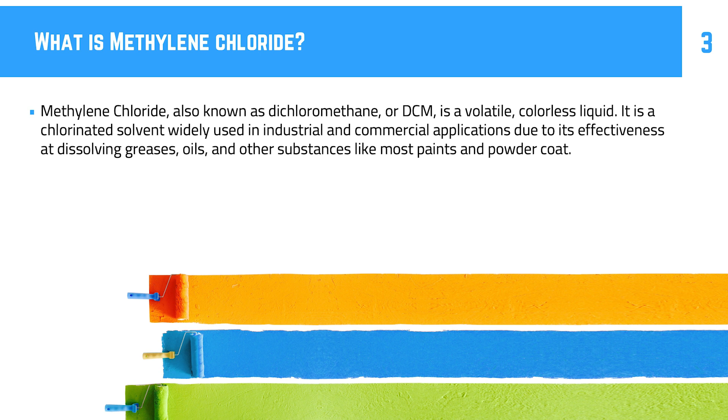So methylene chloride, what is it? It's a bugger. It's known as DCM. It's volatile. It's colorless, and it's nasty stuff. It's a chlorinated solvent. And the textbook definition is here on the screen for everybody. It is going away. The EPA is working on regulating its use in industry out, and that's largely due to health reasons. So there's a reason, though, that this industry uses it, and many industries use it, not just powder coating. Why are we chemically stripping? It's efficient. It's ideal for many of these applications. The process is ideal - it's not ideal for human health and environmental safety, but it's ideal from a process perspective in many ways and in many applications. And it's effective. It's faster than the thermal burn-off, and a lot of abrasives on the market will struggle to remove some of the more difficult powder coats out there as well. And it is an effective grease removal in many applications as well. So it's used, it has been used, because it's effective, largely.

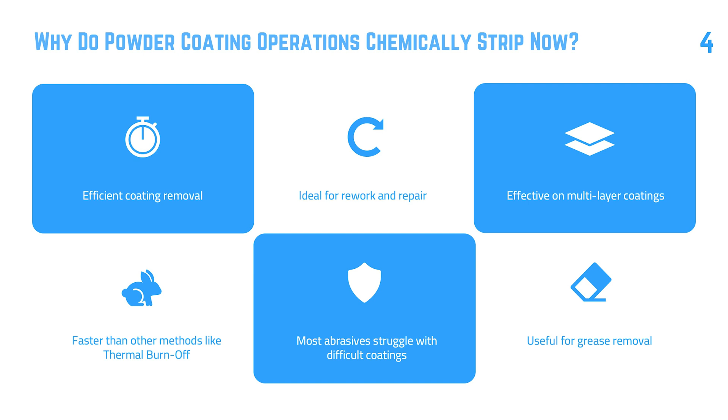So there are drawbacks, and this is kind of starting to touch upon why it's going away. So it is hazardous to human health - immediate contact can cause chemical burns, and like really, really bad ones. Doesn't have to be a long contact either. And then there are longer term health outcomes. There's studies out there that link this to cancer risk and also neurotoxicity. This is why the EPA is going in the direction they are, but it's why some processors have already moved on from chemical stripping. Some of our customers have totally eliminated their reliance upon that and gone to just blasting. A lot of it is, they get certain alloys that they don't know what they are, or their customer unfortunately doesn't know what they are, and they're expensive parts. Typically the parts that aren't going to be able to make it through chemical stripping - because they'll be ruined or totally destroyed one way or the other - are more expensive metallurgies. So there's some downsides, there's some risks in that way. Of course, there's ways to test what the metals are, but that again adds steps to your process. And there's a cost component here.

Think of it as an extra step. Jacob, I know you've talked with me a few times about that in a business process, like having that extra step—if it's not necessary, it just adds cost, and it also increases the chance for failure, and it's increasing the amount of time you have to spend on a part.

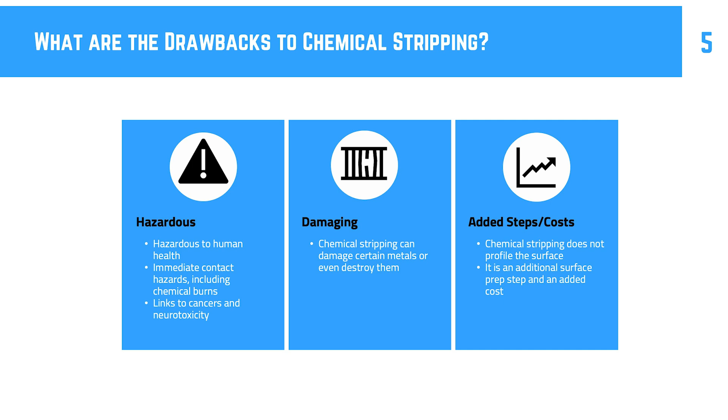Yep, exactly. So the main reason is safety, right? The EPA made a determination, and they issued this with a final rule back in 2022, late 2022. There's other chemicals out there that have gone this way as well—there's a few examples here. This is very unlikely to change. I don't think that this is political. I suspect that this is going to stick, and we've already seen some suppliers actually exit the market entirely because of what's coming.

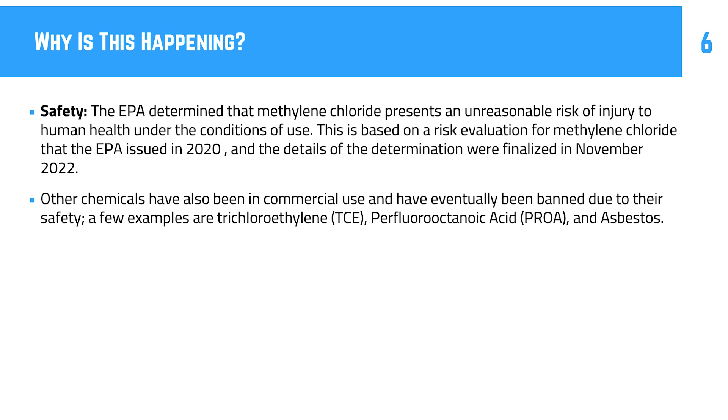So the regulations that are coming, what they're talking about—it's the 2024 methylene chloride regulation under the Toxic Substances Control Act.

EPA's making a cutoff for the use of this as of May 8th, 2029, on what is essentially a special carve-out, and that's for use removing paint from wooden furniture. For most other applications, the cutoffs are actually quite a bit sooner.

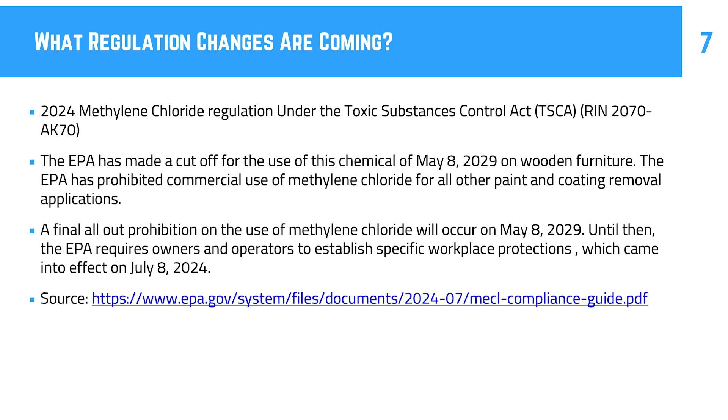We're looking at the things that are coming into effect this year, and I believe we have a chart on that. Yep, so here's your timeline.

February 3rd, that's when the hammer came down, where you have to stop distributing it in commerce. May 5th this year is when retailers will have to stop distributing it. And manufacturing, other than for the special cases that we already talked about, will become prohibited.

And this is a question that we were asked even before this presentation—so, well, what about the imports? And no, the regulations are very specific on that. It includes a ban on imports, so we put that on the timeline. Thought it was important to put it there.

And then beginning August this year, processors are going to be prohibited from processing it. And then you have late April next year, where industrial and commercial users will be prohibited from use of the material. And then the special carve-out ends everything May 8th, 2029, regardless of what the application or end use is.

So this is going away, and depending on where you are in the industry, it's going away a lot sooner than later. So now is the time to be making a plan for how you're going to adapt your business to this.

Yes, it's totally—I've heard this a few times. Well, hey, I stocked up, so I'll have some for nine months. Great, what are you going to do after that? Yeah, you're not going to be able to get it. You're going to set yourself up for failure doing it that way.

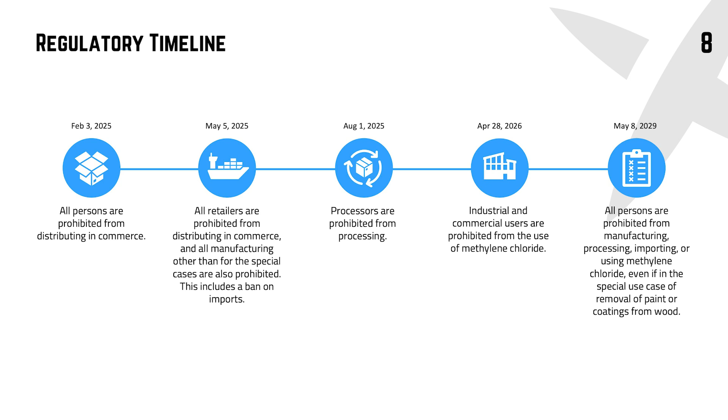I think this is a good overview. We'll keep going. The Workplace Chemical Protection Program - so if you're using this material, even under special use, like say you're working on wooden furniture, you're going to be required to develop and implement an exposure control plan.

One of my colleagues who researches these sorts of things explained to me that for a small business, developing that, implementing it, and being able to survive an audit - because if you're using it under some special program, you can bet you're going to get audited, and it's probably going to be more than expensive. And if you don't pass that audit, the cost of the fines, it's just not worth it.

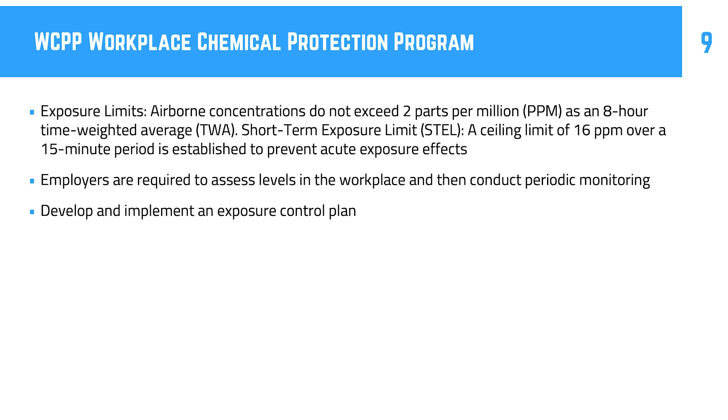However, there's a way to do this, and this touches on some of the basic requirements. But even reaching those requirements, the exposure limits are very, very low. The testing that's necessary is expensive and fraught with issues. It was explained to me that it's much harder to pass the test, even if you do everything that in theory works - you can still have something pop too high, and now your whole program is in jeopardy of being shut down. So it's tough.

So, of course, we're an abrasive manufacturer - Superoxalloy abrasives is what we make, all made in the U.S. And we're going to talk about how we would like you to adapt. But in talking with Jacob and a lot of our powder coating customers, we have a number of powder coating customers who've adopted our product.

They started in a cabinet, some suction, some pressure, and then they moved on from that to, okay, now we're going to get a 185 or even a 375. A couple of our customers have upgraded to 375 compressors, and they're able to put a lot of horsepower out of the end of that nozzle.

What I can tell you is that the customers who have made that transition - yes, it was an investment, but the return they're getting is huge. Their workers who are nervous about safety, some of them have had chemical burns. I'm not talking long-term risk, I mean immediate - where a guy's hurt his hand or something like that. One guy had an eye injury that was god awful.

But these kinds of risks, if you can just totally eliminate that - because they're investing in blasting, what used to take them say 15, 20 minutes for a car wheel, for example, now they're getting done in under 6. The guys running a 375 laugh and say they can do it in under 2. I'm like, alright, sure. It depends on how quick you can maneuver the wheel around, or if you set your rollers right - awesome. The point being, there is an alternative to this that doesn't require any chemical strippers.

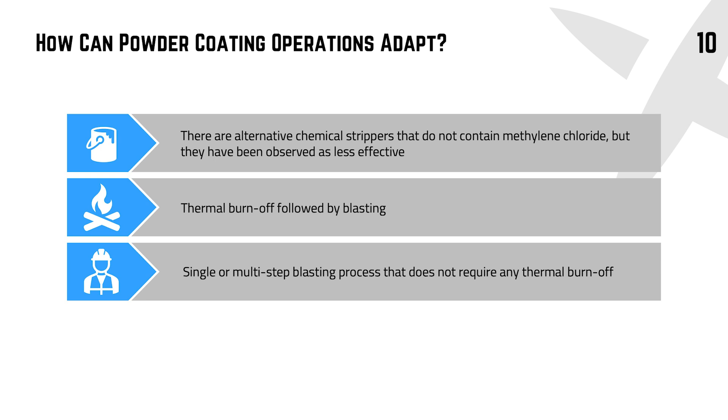Yep, absolutely. So now we're going to talk a little bit about how we can do this with an abrasive, actually eliminating the chemical stripping entirely from your process, right? There's some benefits to this if you actually invest in it. If you just simply have a suction cabinet and your compressor's undersized, this isn't going to work. You're going to have to do more than that.

A lot of our customers that first start with us are starting with an undersized compressor, and then they're working up from there. You got to start somewhere, but I'll tell you, the lower first cost has a much higher ongoing cost in a process like this. So to me, it's totally worth the investment.

Now we'll talk a little bit about that. If you're in a space-limited shop or layout, and you're already going to have some square footage devoted to blasting anyways, and you eliminate the chemical stripping, you're freeing up some floor space. How much will depend—that's unique for everybody. But there's a real consideration of freeing up floor space or clawing that space into your blasting space, if that's an option.

Getting rid of the chemical strippers, right? We can't predict what regulations will be in the future, but I've heard from a lot of folks who said, well, now that the good stripper is going away and I've got to do all this extra stuff to make a chemical stripper actually work the way the methylene chloride based ones would, I'm going to do all this work, and then six, twelve months, two years later, it's going to change again and go away too. So a lot of people are saying, now I'm confident that an abrasive like 10X is going to be around. It's got staying power, so a lot of folks we've been talking to are going that way.

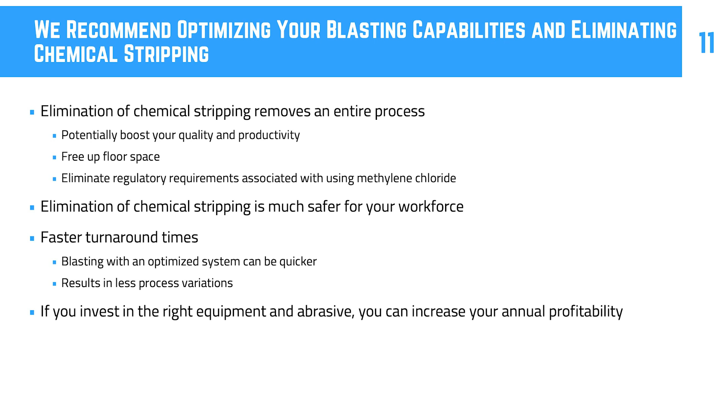So now we're kind of laying the framework here for what making this transition, and still maintaining profitability and potentially even boosting that profitability, looks like.

So we want to be able to get the job work done on time or ahead of schedule. We need fast blasting. Getting your abrasive consumption within the parameters that we expect is important. We can help minimize your downtime. We have an amazingly safe abrasive.

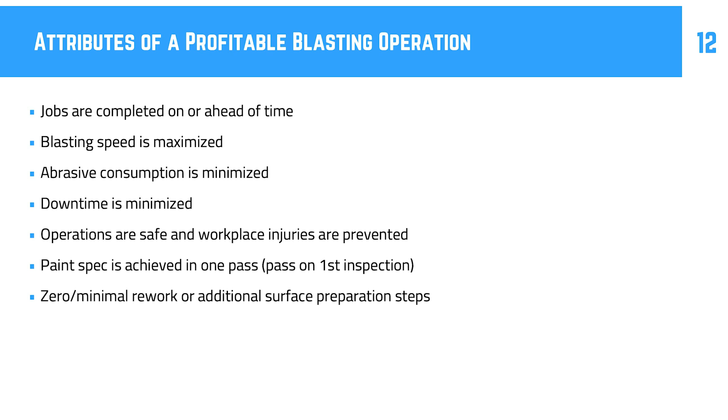Some of our customers in this industry have specs they have to hit, and when we take away a step in the production process, being compliant with those specs just tends to get easier. We're also helping to minimize rework. What we want to talk about today, we don't like to have to do rework. Rework is probably the most expensive thing in a powder coating operation that you can end up having to do.

Every component of a blasting system has a key purpose. And if any one of those components is out of whack, it can make the difference between being profitable and even running at a loss on a particular part of the job.

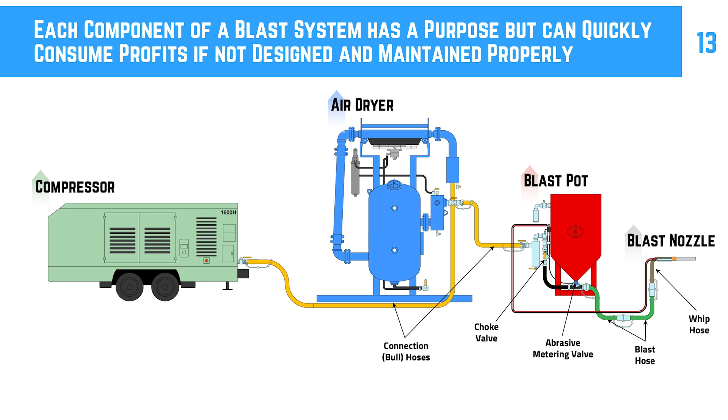So this is a nice little visual here, and a shout out to our colleague Elena for pulling this into this presentation. I don't expect everyone's compressor to look like this, and again this is just for illustration purposes, but the compressor is where it starts. It's the engine of the blasting system. Think of it as the heart of the blasting process.

It's really important to make sure you have the amount of CFM you need. I always tell everybody, always get two sizes bigger. Oh, I need a 185? Great, I have 375. Why would I do that? Because you're going to grow, and you're going to have this and that, and now you're running another spray gun over here, or whatever it may be.

Maybe you're going to get into something that needs other sources of compressed air, and you're stealing your productivity from your blasting process if the compressor in your facility is sized for that process and now you grow. So if you upsize your compressor, you can avoid that problem to begin with. That's what I recommend.

But the key here is to not undersize. At a minimum, do not undersize. Make sure that you're able to get the recommended pressures. We have charts on our website, and Jacob and myself are available in the group for anybody who needs to bounce ideas off of - hey, would this work, would that work? This is what we do. We make sure that you get the right answers.

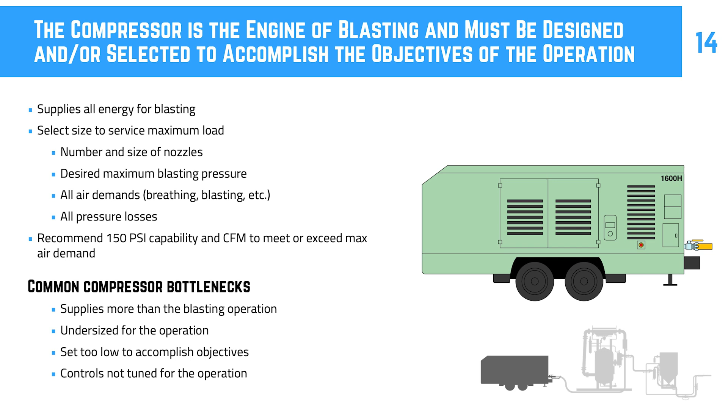And then, of course, the compressor controls. Compressors can be set with all kinds of energy saving features that are great, but sometimes they get in the way of performance. So again, that's very situation to situation. Even two identical compressors coming from the factory - sometimes different dealerships put in different programming logic, and one can work great while the other can be an issue.

So we see that. Next step, air dryer. If we're sending wet air to what you're trying to do, you're going to get embedment. You're going to have all kinds of issues that come with that. Compressors are compressing at least 100 to 1 - the air in the atmosphere is being compressed 100 times. We're squeezing the water out of the air, and now we're throwing it at the substrate at high pressure.

And there's reasons why most compressed air systems are always going to include, right out of the gate, some sort of air dryer, and then maybe even an additional moisture or water separator. So it's important to make sure the air dryer in your system is matched for the CFM of your compressor. If it's undersized, it won't perform. Oversized isn't usually an issue, but it's just not cost efficient. So you want to make sure those are married up to each other appropriately.

If you have moisture in your blast air, we've seen excessive abrasive residue left on the surface. You've seen problems with coating quality in some cases after blasting, and a lot of that's just because of the first problem we talked about. Our abrasive has an uncommon benefit of delaying the formation of rust bloom after blasting, and that often goes away if you're blasting with a bunch of moisture in your air.

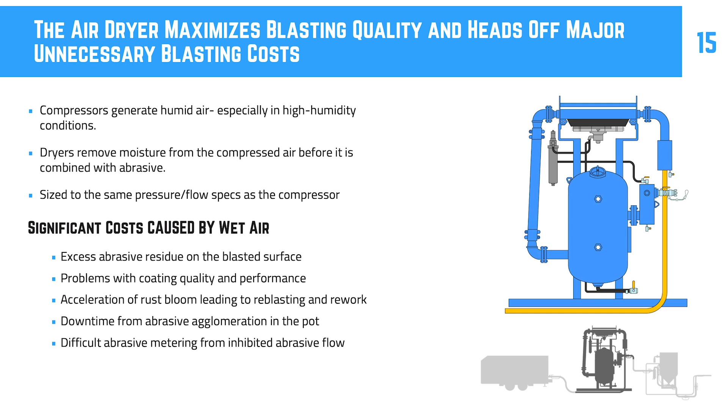So you want to avoid that. And again, your abrasive metering can be challenged. It can have issues if you are blasting with wet air. So there's a number of reasons, technically speaking, that we want good, clean, dry air.

Blast pot metering valve. For this example, we're specifically talking about a pressure system, not a suction system in a cabinet. There are a lot of cabinets out there that are great with suction systems, but in my opinion, if you're replacing chemical stripping and you have any kind of volume of parts going through your business, you're going to want a pressure system.

That's why we're focusing on this, because this whole video is essentially informing you of the regulatory changes with the loss of a chemical that a lot of folks are using in their business, and how to adapt to that. I would not adapt by going with a suction cabinet. I would immediately go to pressure blasting.

And a suction cabinet won't even remove powder. You'd be spending hours and hours, at least 6 hours on one wheel. It wouldn't be feasible to even be a business.

We have customers, to give you a sense, that are doing an average size wheel in under 5 minutes. And then we have customers with a 375 that are saying they can do it in a little under 2 minutes. That would just never happen with a suction system.

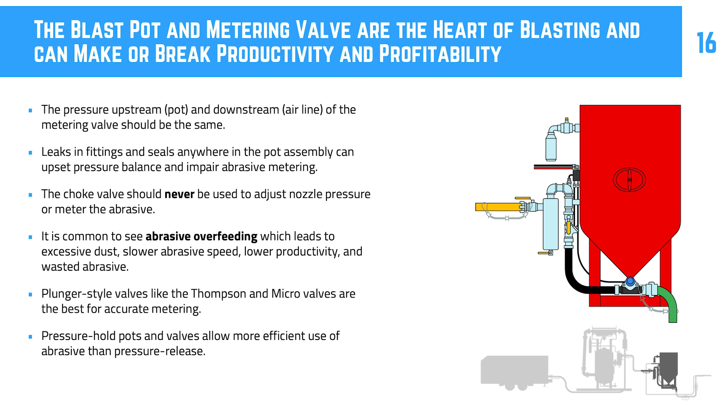This is so important. We're using examples of what we would see in large industry, but regardless of how you connect from your compressor to your air dryer to your blast pot, and then your blast pot to your nozzle, it's all about sizing correctly. If you undersize that, I don't care how, you could have a 600 horsepower compressor running one blast nozzle, but if you undersize the critical connection points, you might as well have a 10 horsepower compressor. It's just not going to work.

You can't limit the energy delivery of the compressed air. Think of it this way: if you're doing this, you're investing a lot of money into getting that air compressed, clean, and dry.

And if you undersize it, you're just not going to get your return on that investment. So it's very important to do this. We have guides on our website that help you understand exactly how to size your hoses, your nozzles, and all of that. It's pretty simple, but we focus on this so much because a lot of people undersize things. Hey, I'm buying hose or I'm buying pipe, and if I go a quarter or a half inch lower, look, I can get this deal - and it's really the worst deal going.

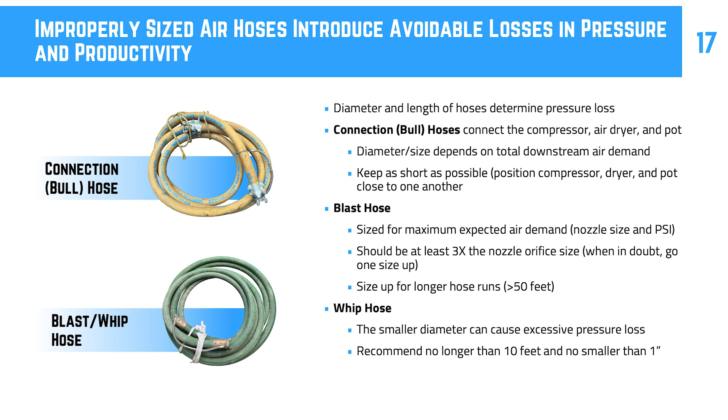Nozzles are similar. There's a lot of different kinds of nozzles out there. Our abrasive works with - I've not seen a nozzle that our abrasive doesn't work with. Some are better than others. We prefer this XL nozzle, but for some applications it's not appropriate. We have an entire web page, and I think even a video now, about nozzle selection.

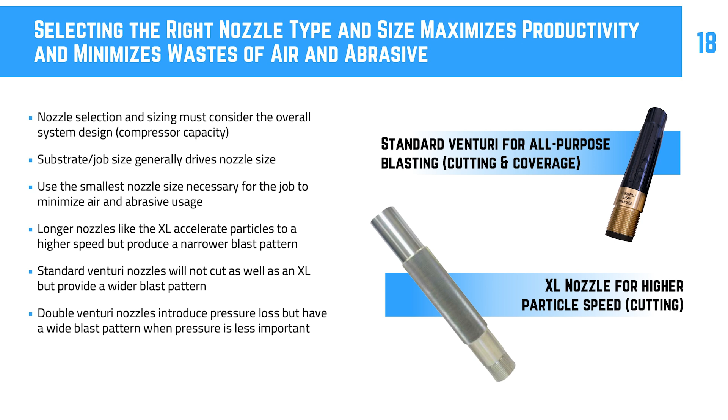And it's similar to the connections that we talked about - don't undersize it. The other thing that happens is people get it right, but then they've been blasting. They've got 4,000 hours of blasting time on a nozzle, and that nozzle is now 3 sizes bigger than when you first bought it. These things are wear items, they're consumables. They wear out, and when they wear out, it's time to replace them. You're not getting a return on your investment in this whole blasting system if you're running a nozzle that's 3 sizes bigger or 2 sizes bigger than what it's supposed to be. Your air pressure gets reduced, and the Venturi effect is gone - that Venturi isn't doing what it was designed to do once it's opened up. So just think about that.

Steve has talked about this so much - blaster training and technique can make or break whether the business works. This particular image here, Mike is the blaster. He's a Canadian customer of ours, a powder coater. They use EpiX MP, and they were so impressed with our product that they actually asked if we could do a customer spotlight, like a testimonial.

So there's a video on our YouTube channel - Impact Coatings is the name of the business. I think they've been using our product now for a little over a year. They told us that once they got the pressure up and understood how to use our product, they were able to double their throughput and double their profitability. Also, being in Canada, they haven't had a methylene chloride option up there for a while now, and they had already gotten rid of and gotten away from that. They would only do a process like that in an emergency situation, and they're blasting everything. So they had a huge setup, and they're able to handle it.

If you watch the video, it's wild - I mean the part that's there, he's done in something like 10 seconds. He's got to flip it around, and he's got 10 seconds on the other side. It's very fast. He said that blasting used to be the bottleneck for the business, and now coating - everything other than blasting - takes much longer. The blasting, he's able to put parts out that are ready to go 2, 3, 4 times faster than what the rest of the line can keep up with. And that's what our product can do if you make the investment that we're suggesting.

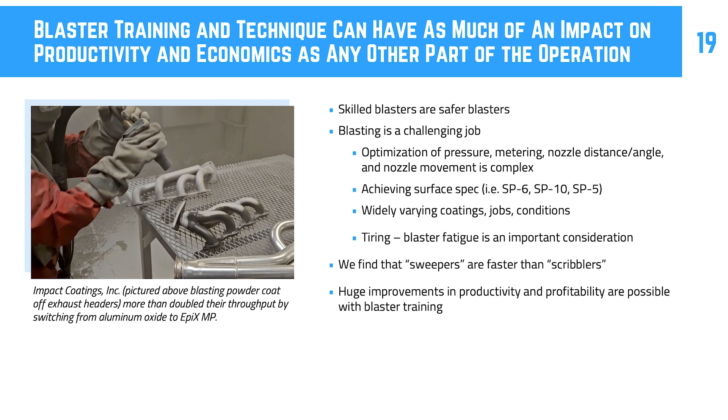This is very easy stuff to learn. It's totally worth doing. There's a lot on this page. Again, if you're not quite making this transition just yet, this might be a little further into your process when you do, but there are some basic tools.

Goodbye -- it's going to cost you so much money to be blasting with a worn down nozzle. It'll make you go slower, you'll use more energy, and you'll get lower quality surfaces too. This is real, and your abrasive consumption may even increase because you're not able to get the proper pressure. It's just so important, right?

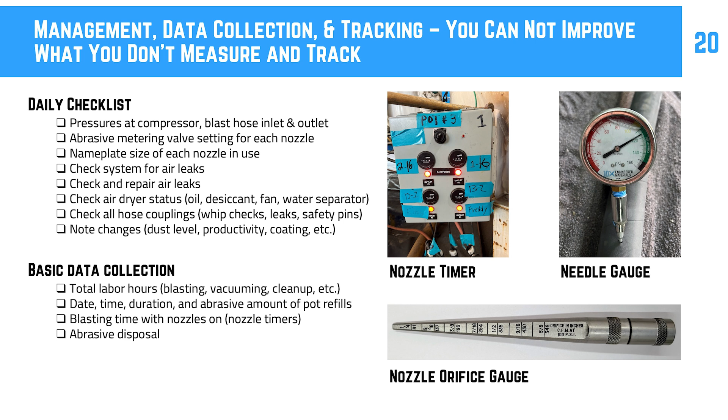Now, this kind of explains the example that we're using here is a larger job, and largely because we put this together quickly.

Jacob came to me and said, hey, we need to talk about this. People are asking all the time, you got to get some information out there because people want to know, and you guys are a great group who have the resources to bring this knowledge forward and get it organized. So we put this together quickly for that reason.

So we're kind of recycling one slide from Steve's last presentation. I don't know, Steve, if you want to talk through this, but we wanted to include this so people have some background on the case this can make. Yeah, I can quickly cover this. So when we did that other webinar, we were focused on profitability.

And what Jake covered today, everything from the compressor to the nozzle and the way the blasting system is set up, all matters greatly. But then there's the training of the blasters.

And so what we did is a little economic analysis. This is very conservative—the actual benefits are probably higher than what's in this chart. But let's just say if you have a blasting operation, the base case, and your net profit on that is 55K.

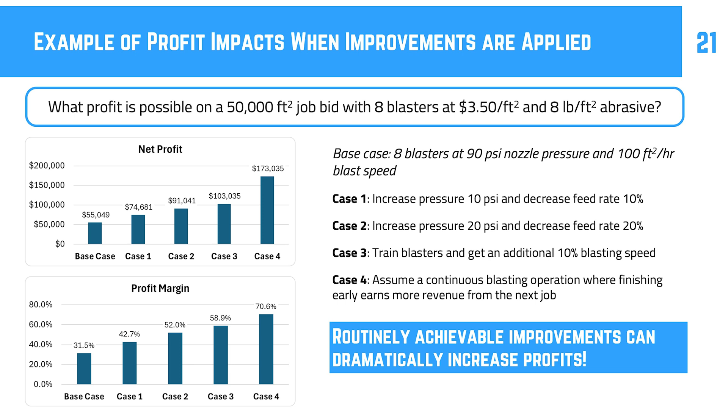So we're seeing this kind of twofold: it's going to get harder and harder to do this kind of work with that process. So we're making our recommendation to switch to blasting. And if you get ahead of it, we can help you adapt your business to this and do it in a way where we can actually probably help you increase your profitability and throughput as well. So that's all we have for everybody.

We really appreciate it. I have a couple of questions that came in by email here that I'll read off. Jacob, this is a little off topic, but I'm going to take it. Somebody sent in asking about the marketing of a powder coating business—will it be an advantage, or do you think it'll be an advantage to start marketing as a business that's not using any chemical strippers?

It's marketing 101. There are different targets out there, and some people like the idea that you're supportive of everything becoming green, so there's definitely a marketing angle you could hit with that. Do I think it'll bring you a ton more business? No, I think showing your finishes and the quality of your work is really where it's at. Just like selling a product, it's all about does it work, is it functional, and is it what you need.

When it comes to marketing, the basics are being known before you're needed in this industry. If your business name is known before they need you, then when they need you, you're top of mind. You're going to get the call or the message, and you're going to get to quote that job. The other thing is actually invest in marketing - have some sort of presence. You don't have to spend all your free cash flow on it unless you're just starting up with big goals, but have some investment in it and make sure it's managed. What you manage tends to improve, and what you don't tends to stagnate or even decline.